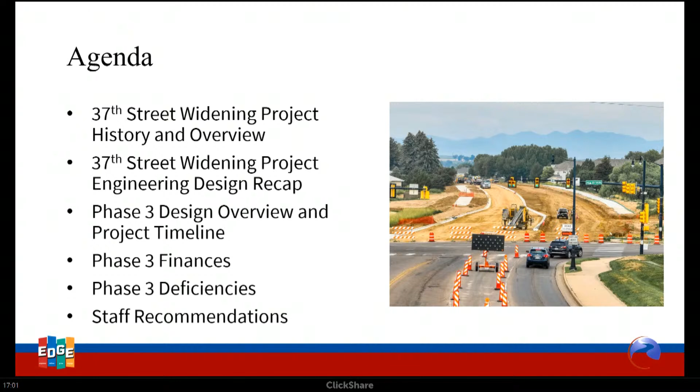First I'm going to talk about the history and overview of the project, where it started, how it evolved, where it is today. Then we're going to move specifically into Phase 3, discuss the previous City Council presentation in 2023 about the design elements, move into the project timeline, the finances, some recently uncovered deficiencies with where we're at, and then staff recommendations on how staff believes we should best move forward.

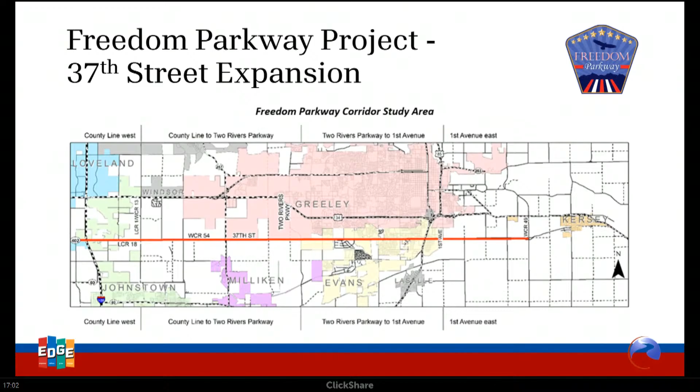Starting with the 37th Street project, as you are all aware, this is part of the Greater Freedom Parkway project, basically to widen 37th between Highway 85 out to the interstate. We have a component of it, of which we have made great progress in expanding the roadway. The goal is to serve as a reliever for the heavy traffic on US 34 and to support increased traffic from residential expansion in Evans.

When this project initially went out for bid, it was identified as the 37th Street and 47th Avenue widening design project. The goal was to widen 47th Avenue between 37th Street and city limits, and then widen 37th between 35th Avenue and 65th Avenue.

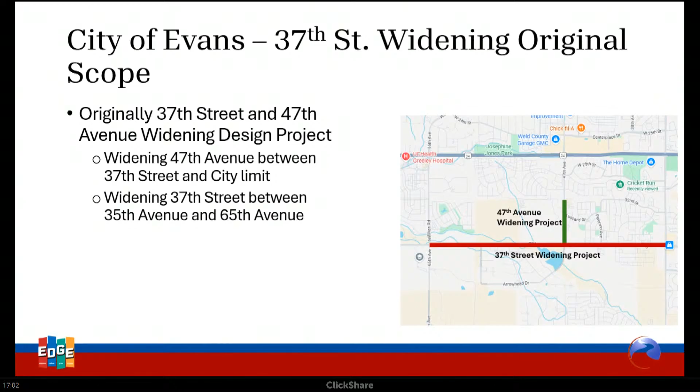I'll go into a little more detail on this in a moment, but the initial contract went out in 2019. In 2021, the city went back to the design engineers to phase the project, basically to break it into more bite-sized pieces that the city could afford, kind of the phases you know today and are familiar with, especially Phase 1, 2A, 2B, which have seen great progress in recent years, and then Phase 3, what we're going to be talking about tonight.

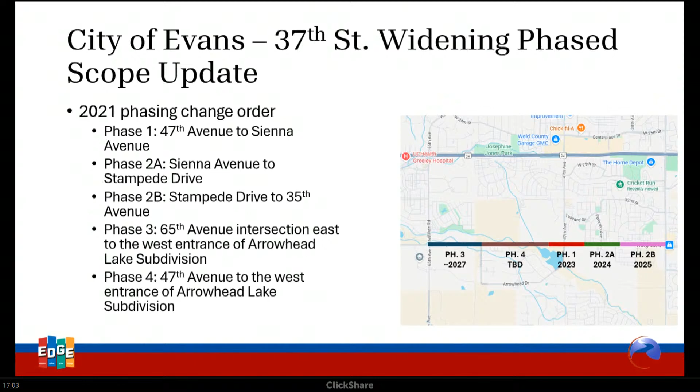To discuss the engineering side of this, in February 2019, the original contract for the design of this project was awarded to RockSol. I think it's important to mention that they were awarded the contract despite being the second highest bidder, the low bid being a little more than half of what the original awarded contract was. I included the specific language in the staff report, but basically the justification at the time was RockSol was the most responsive to all elements of the scope of work in the RFP, and staff at the time were confident in their ability to build the roadway to the CDOT specifications that they were hoping for.

Two years later, in May of '21, there was the first change order that I mentioned on a previous slide. That change order is attachment B in your packet. This was basically breaking down the project into standalone projects between 1, 2A, 2B, 3, and 4. There was also some work beyond the original scope that was included, some things that staff missed or that the engineering design firm came across in their work, things that were going to cost a little more money than the original contract was building up to.

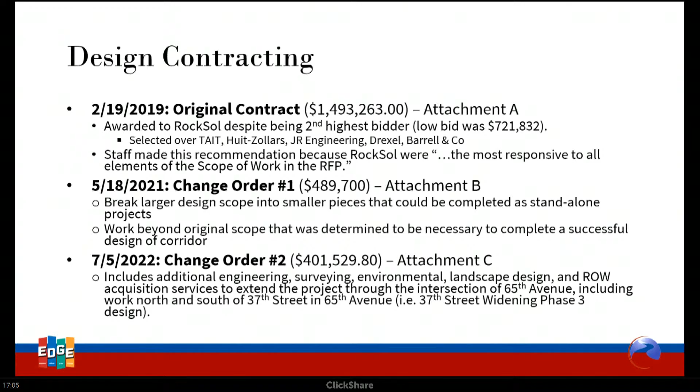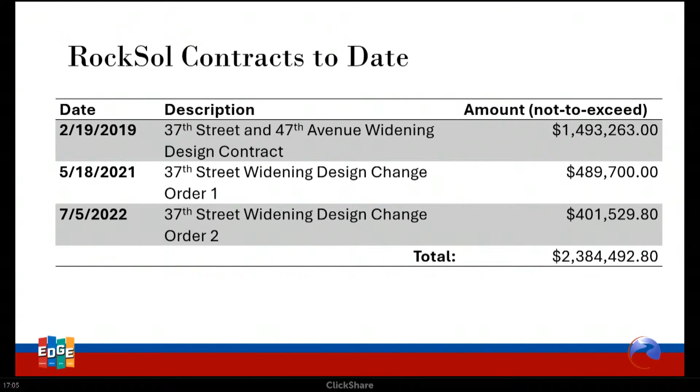A little over a year later, in '22, there's change order number 2, which is attachment C in the staff packet. Basically the gist of that was the phase 3 component of the project, to take the 37th Street component, extend it through 65th Avenue, and look at the 65th Avenue and 37th Street intersection. In total, we went from a $1.493 million contract to a $2.384 million contract with the addition of those 2 change orders.

Discussing the current state of the contract, there is approximately a little less than 7% of the project budget remaining. So $2.2 million out of the $2.384 million has been invoiced and spent by RockSol.

Cody specifically asked me to look into how much of that was remaining in contract value for the phase 3 work as part of that second change order, and how much was left in overall project contingency. We have just over $40,000 in contract value left as presented in change order 2.

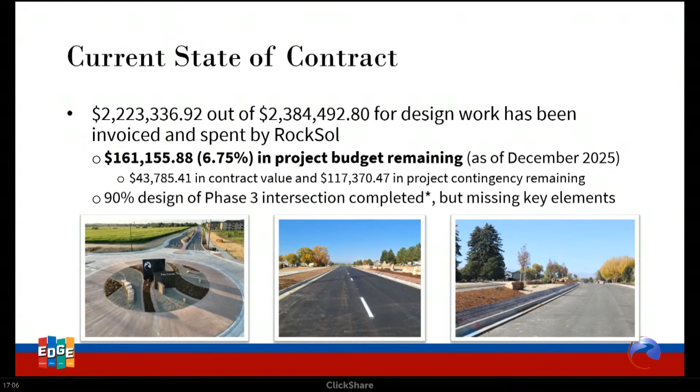And then just over $117,000 in project contingency remaining. The state of the project, I kind of listed here as 90% design of phase 3 intersection complete, but it is missing some key elements. I'm going to go into those elements that our engineering team, which has undergone new staff member changes, has come across and has been hoping to work with city council and city leadership to address.

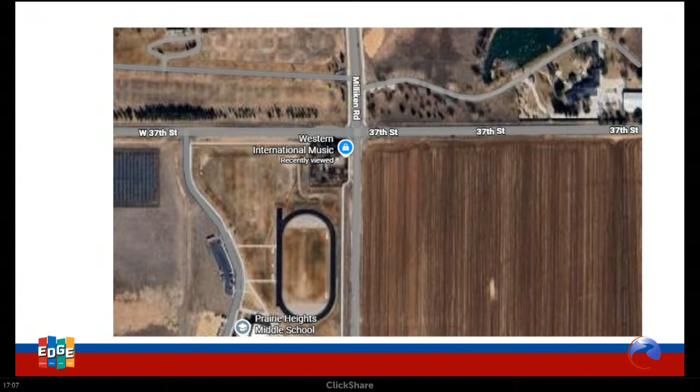You may also ask, this project, I talked about a change order in '22 - well, how has this progressed? Where have the problems been uncovered, and how are we working to address them?

So in '22, we had the change order soon after RockSol started the work. A lot of work happening behind the scenes. And then in February '23, engineering staff at the time specifically came in front of city council in a work session with the goal of presenting two alternatives: a signalized intersection or a roundabout.

I've included that as attachment D and E in the staff report. That predates me, so I wasn't part of it. It's been a lot of picking up the artifacts of some of this, but I wanted to have a full understanding of what came in front of council already and how things have changed since then.

As we moved into '24, we had CDOT approve the right-of-way plan in June. A few months later, we started looking at right-of-way service surveying and negotiations with property owners. Those two driveway access points I mentioned - that doesn't seem to have been identified as a problem until this moment.

As we discussed that, there's specific right-of-way that the city would have to acquire in order to expand the intersection based on the proposed design. And so there's a challenge to do that within what the city owns.

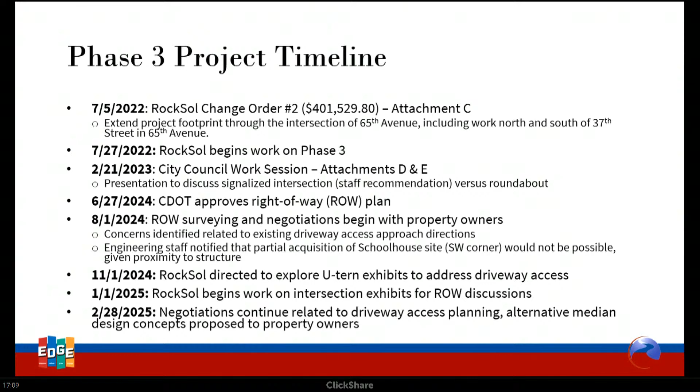That was the ask - the city wants to work through the right-of-way acquisition process with them. So we started looking at different ways that we could consider their demands and get what the city needs, which is expanded right-of-way. As we pushed into '25, we started looking at alternatives there, including potentially modifying the median design associated with the RockSol-provided signalized intersection, which then brought us into the second half of this year, that basically signaled that because we now had additional right-of-way from these negotiations, we would need to resubmit our plans.

Specifically, I'm going to skip one ahead to that property on the bottom left, the schoolhouse. We received word that the intersection alignment would be too close to the structure, and the only way the city could move forward was to purchase the parcel as a whole.

As we pushed to the summer and tail end of the summer, we continued to explore median alternatives that could meet the needs of the driveway access folks.

Internally, we started having conversations about whether there was going to be a collaborative approach to this and what that could look like. We had one last Hail Mary where we tried to bring CDOT in to discuss some of their access concerns associated with the median. While they were comfortable with some of these modified median designs, the project engineer responsible for the design wasn't able to come to an amicable solution they were willing to stamp.

When it comes to engineering projects in the city, we do not want to move forward with unstamped, unapproved designs, because that takes the liability out of the trained professional engineers and puts it elsewhere, which is not a risk we are willing to take.

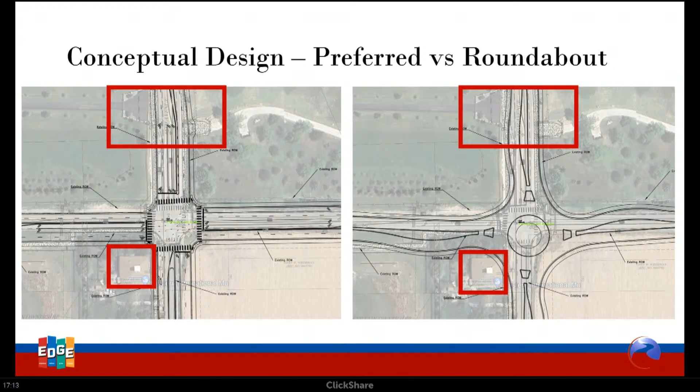There's a second component of that based on growth rates that pushed out data showing that the roundabout would potentially reach an undesirable level of service in 2045, based on the growth projections used, which I'll get into in a little bit.

So I'm going to go over a few of the main take-homes from that work session. The cost provided is something to really take note of. The engineering staff at the time showed a cost estimate between 5.1 and 5.8 million, and right-of-way acquisition of 2.8 acres for the signalized intersection. For the roundabout, we said it's going to be a little more expensive, $5.3 to $7.1 million, mainly because there'd be a higher right-of-way acquisition component.

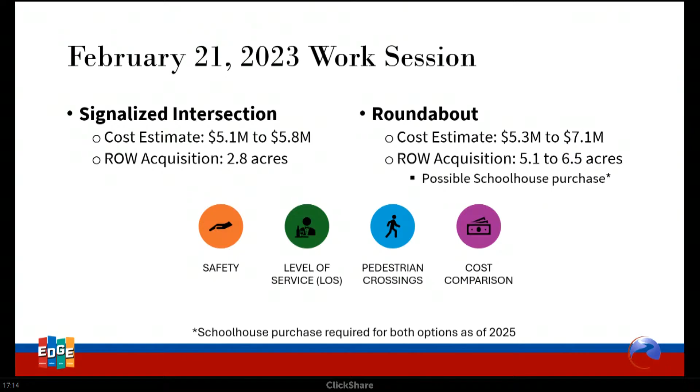As of 2025, we now know that for both of these, the schoolhouse purchase is going to be required, and therefore the cost breakdown is incredibly similar and is no longer a driving differentiator on how we move forward. I share this because I think it provides insight into how the engineering department was sharing information with City Council at the time.

This is a slide you would never see come from me, because I would look at something and say level of service fails in the long term and is better in the long term, and I would really struggle to bring that in front of a group that has a really difficult decision to make. Looking back at this, quite a few of the assumptions presented here, and quite a few of what was provided for City Council to select one item or another, were presented in a way that the answer was basically already made up going into the conversation. It comes off as an argument made for the sake of giving an alternative, without providing an opportunity to actually consider two valid options.

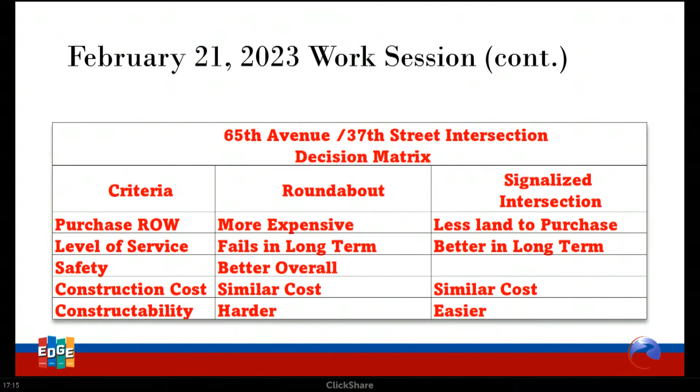So what that ended up spitting out was City Council was comfortable moving forward with the staff recommendation for a signalized intersection based on what was provided, which is the logical decision when you see a more expensive option that you're told is going to fail by 2045.

But the job of our engineering team is to take a step back and look at how we feel about those assumptions, how we feel about the costs that were provided. This next slide is going to be a bit shocking, but our engineering team did a great job looking back.

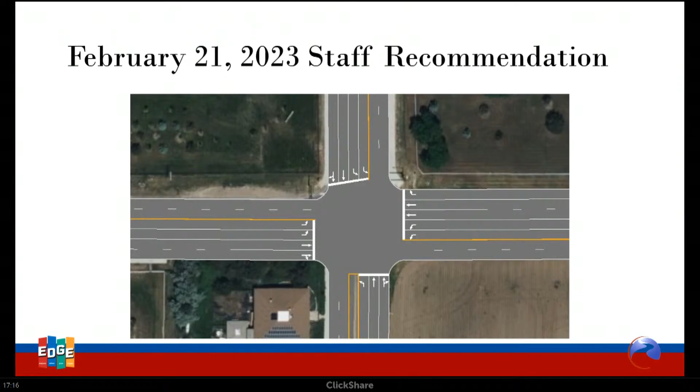Trying to figure out what is an accurate cost estimate for this project. What was originally billed as between a $5 and $7 million project for a signalized versus roundabout is today right around $14 million. One of the major discrepancies is that the approach taken by the engineering firm originally was put together in a piecemeal way, using percentages of previous projects instead of looking at line item materials and line item designs for the specific design provided.

So we have this $14 million project budget for phase 3 as designed, signalized intersection. We have $7.4 million budgeted, which includes $1.5 million in grant funding. I'll mention that your packet did mention $5.6 million — I worked with Jackie to make sure we had the right number. We had to roll over some of the funding we originally earmarked for 25. So it is $7.4 million available in budget, still very short of the $14.2 million.

This is quite a ways higher than the $5.1 to $5.8 million shared with City Council two years ago, and higher than the $4.4 million estimated as part of the Surface Transportation Block Grant application, which is the application we used to obtain the $1.5 million in grant funding.

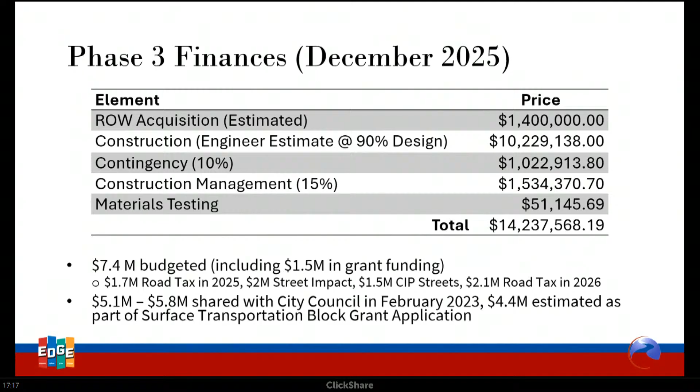This pushed us into, okay, we've identified some deficiencies with cost. There's definitely some discrepancies with what was shared two years ago. There were definitely some issues with the estimating, and that pushed our engineering team to start having conversations about other baseline assumptions that were presented to City Council as fact.

The first was looking at the growth rate. We've had lots of conversations about the growth rate in relation to water, wastewater, and transportation. It's something we always need to keep on the forefront, and it's something that's a real challenge to get right. But if you end up too conservative in terms of trying to overplan for things, you end up with $14 million plus projects you can't afford.

As part of the city's grant application, what we shared was that we're anticipating between 1.7 and 2.1% growth between 2015 and 2040. That differs from the growth assumptions used as part of the design of this intersection, which was a 3.9% growth rate — a combination of the 2.8% traffic growth on 37th and 5% traffic growth estimate on 65th Avenue.

I had to do some deep dives into figuring out where these numbers came from, so engineering and I worked through emails back and forth on how we came to this point as a city. My research suggests it was a combination of the North Front Range MPO's modeling with adjustments for expected developments associated with Tuscany and Peakview, which were the two mentioned there.

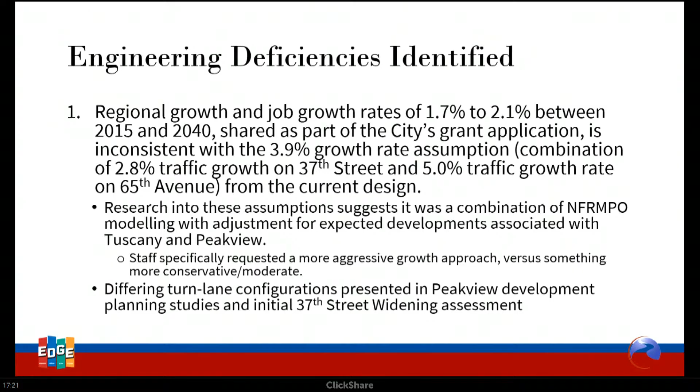I think current staff would say we lack confidence in this data and what it's led us to. I just wanted to provide this slide.

All of this pushes us to these main concerns: is the city confident in the 2045, 2050 approach to growth projections? Because that's what we're talking about here. This design is a 2045 design year intersection. Can we justify a $14.2 million intersection knowing the state of our street CIP backlog that we've had conversations about?

We also have to recognize that the landscape that I've shared in this map has changed since we started having a lot of these conversations. This intersection went from serving what we thought was going to be part of Evans into serving Greeley to the north and a huge chunk of Milliken to the south. Can we justify a $14.2 million intersection to meet 2045 expectations, knowing that Milliken is really going to be the one who provides the additional demand, and we don't really have much insight into how that's going to happen?

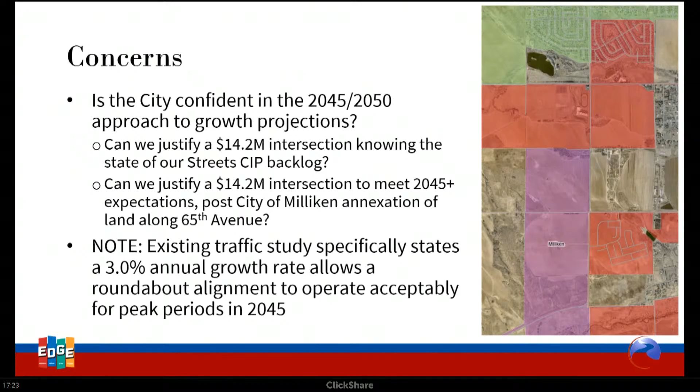That's engineering deficiency one. I've listed three here. The second being the current 90% design alignment has right-of-way acquisition concerns. As I've mentioned, we've tried to reach an amicable outcome working with the landowners. That is something that doesn't seem to be possible. It's not something we should plan around.

The main consequence of this is that it puts our $1.5 million grant from the North Front Range MPO at risk. So we have decisions to make, because $1.5 million, given our road taxes between 4 and 4.5 every year, is a big chunk of change that really will help us decide how to move forward on this. Number three, $14.2 million is almost double our project budget. So if we want to move forward with the largest, most complex, most expensive intersection in Evans at 65th and 37th, there's going to be compromises that we make as part of our street CIP.

I also just want to add that when we look back at the phase one roundabout, which was just a few years ago, we're talking about construction alone that's $6 million more than that.

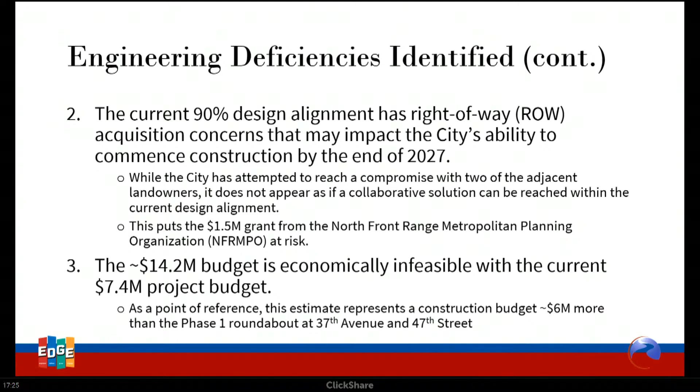And so it would be a huge challenge to fit into our budget as is. I appreciate the opportunity to come in front of council and discuss that this is not, in staff's recommendation, the best decision for the city at this point. So that pushes us into staff recommendations.

The first being the city should consider ceasing all work related to 37th Street widening phase 3 with RockSol. Outside of how the procurement process and change order process happened, current engineering staff and myself have not been impressed with some of the professional responsibilities that seem to have been potentially put aside at the behest of potentially city staff at the time. But when we look at work like this, we don't have traffic design engineers in-house.

We look at consultants to help us really make informed decisions, to help us push assumptions. And knowing the city, that's an expectation we should have. We should have a level of professionalism. We should have solid data behind decisions. We don't feel like we've been provided that quality.

We are at a point where our project budget is basically exhausted, and we have huge elements of the project remaining. So the options that come before you are: a contract amendment to continue additional work with RockSol, because I don't believe there's any chance we could redesign this intersection in the existing project budget, or, as bullet point 2 alludes to, should we consider the redesign of 37th Street Phase 3.

Taking another peek back at the utility engineering, traffic count, growth assessments, understanding the right-of-way concerns that we now know about, understanding what the city of Evans can afford, and trying to make a compromise solution to an intersection that fits what Evans needs now, that doesn't have lanes sitting for decades between now and 2045. What is the logical approach of when we need it, how we can do it within our existing budget, and still meet what the city needs and expects out of the 37th and 65th intersection.

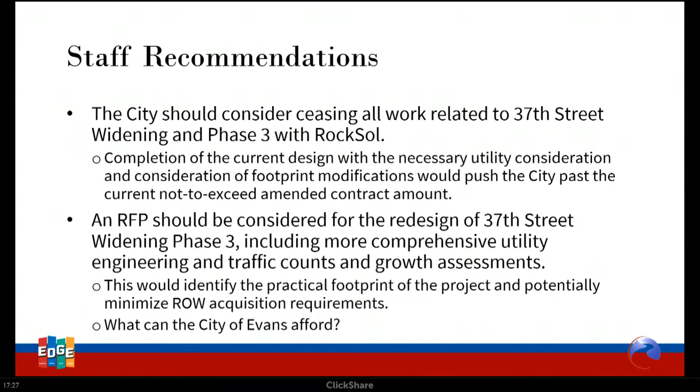Cody and I had quite a few conversations about this, because we don't have project budget available. We are talking about needing to take on redundant design work. How would we fund that?

So what we recommend would be to take the balance of the existing RockSol contract, combine that with some of the additional 1% street sales tax funding, to kick off this redesign work immediately. I want to add that this would not impact our ability to fund 49th Street widening engineering design or street lighting on phase 2A and 2B of 37th.

I know those are high priority for the city council. The numbers do fit that we could do this work. We can roll that balance in and still be able to perform these high important projects.

On the grant side of things, I want to add that in order to maintain grant funding, construction of phase 3 would need to be awarded no later than Q4 of '27. That would push a date that we'd have to have the design work awarded no later than Q2 of '26, giving us adequate time to redo the traffic counts, utility engineering, come up with a modified intersection approach, and then move to construction, still taking advantage of the grant money we've been awarded.

If right-of-way issues still exist with the new design—this is basically referring to, do we have an opportunity to re-engage the roundabout discussion—I would say that if we need to purchase right-of-way outside of the schoolhouse, we would not be able to do that while still being able to take advantage of the grant money.

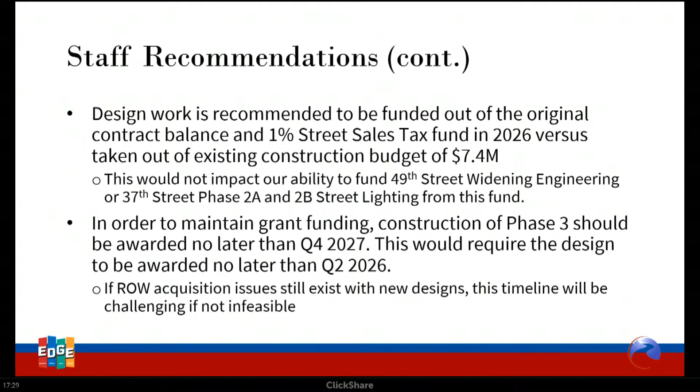I know there was a lot to that. I know some of it was redundant, some of it's new, and some of it counters what City Council may have been told in the past, but Cody and I are here to take questions.